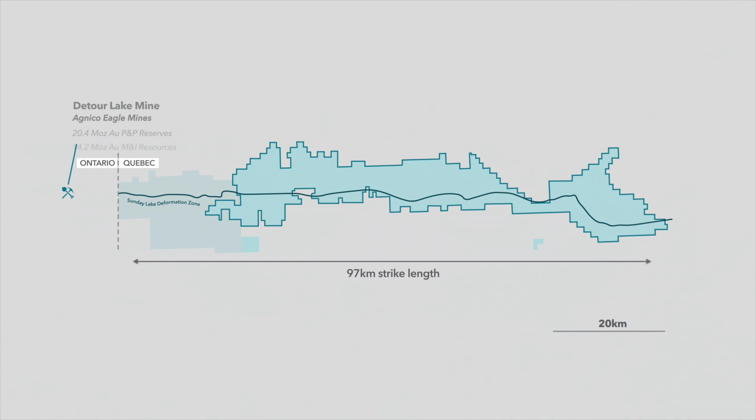Wallbridge Mining Company owns a district-scale land package in the prolific Abitibi Greenstone Belt in Quebec, Canada. We currently have over 5 million ounces of combined gold endowment at two growing deposits of Fenelon and Martiniere along the Sunday Lake Deformation Zone, the same structure hosting Canada's Detour Lake mine with over 40 million ounces of gold.

Wallbridge purchased a small 1,000-hectare property from Balmoral Resources called Fenelon in October of 2016, which included a small mineral resource of about 40,000 ounces, now referred to as the Gabbro zones. We continued exploration in 2017 and 2018 in this same zone, and while testing one of the exploration targets in late 2018, early 2019, we discovered the Tabasco Cayenne zones and subsequently the Area 51 zones, which earned us the Discovery of the Year by AEMQ in 2020.

Our successful exploration results following those discoveries allowed us to acquire Balmoral Resources, which not only owned the rest of Fenelon property, but also owned the majority of the land along the Detour Fenelon gold trend, stretching 97 kilometers from the Ontario border, where the Detour Lake mine is operating. The total land package owned and controlled by Wallbridge is now over 800 square kilometers.

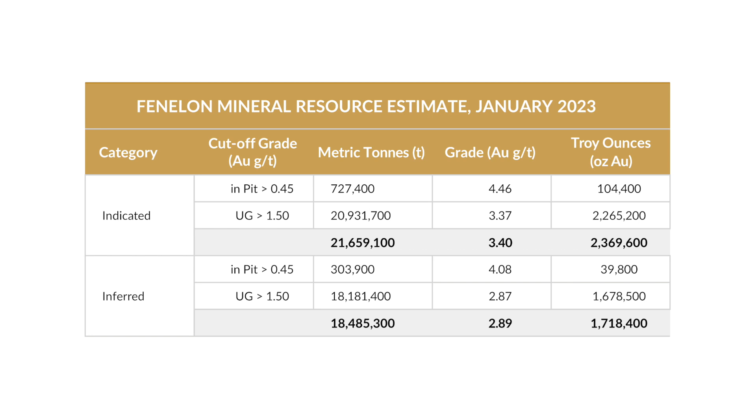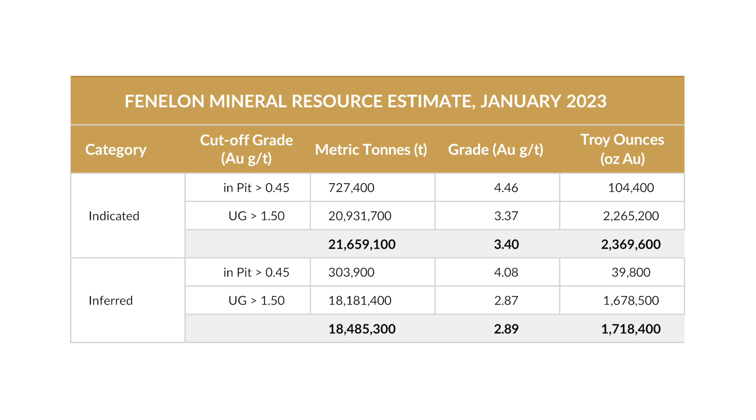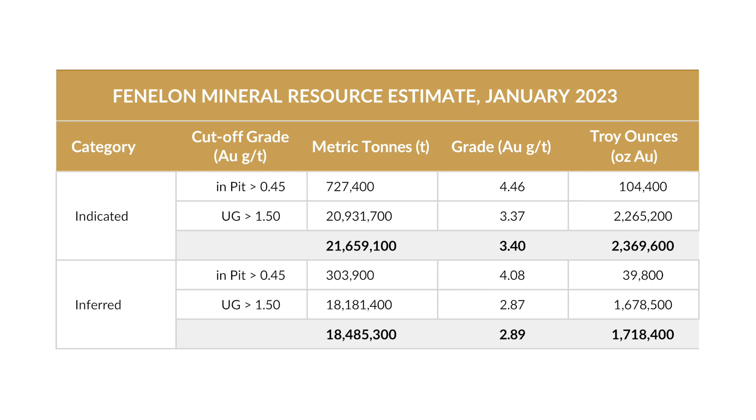Through successive and successful exploration campaigns since the discovery and acquisition, we now have two significant mineral resources at both Fenelon and Martiniere. We proceeded to advance the Fenelon deposit to a preliminary economic assessment, with the results just announced yesterday. The PEA, as reported in our June 26 news release, is based on the mineral resource estimate published in January of 2023, with 2.37 million ounces in the indicated category and 1.72 million ounces in the inferred category. The mineral resource estimate is primarily envisioned as an underground deposit.

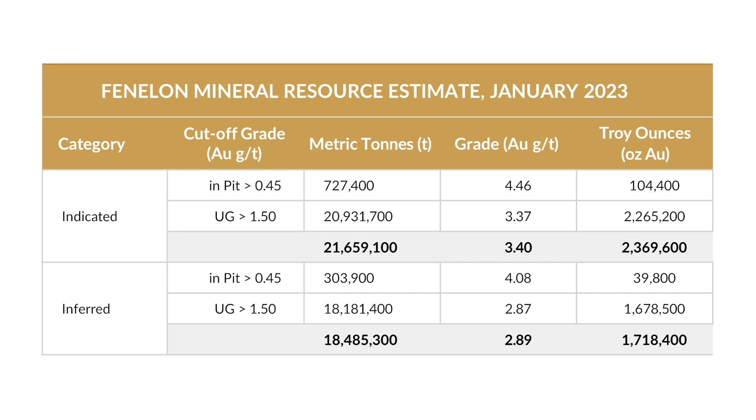This PEA is based on the development of Fenelon as a standalone underground operation with a mining and processing capacity of 7,000 tons per day. Fenelon currently has underground infrastructure down to the depth of about 200 meters, which was completed at various times in the past, including the development completed in 2018 and 2021 by Wallbridge. All existing underground infrastructure, such as ventilation raises and the exploration ramp to Area 51, are integrated in the PEA mine plan.

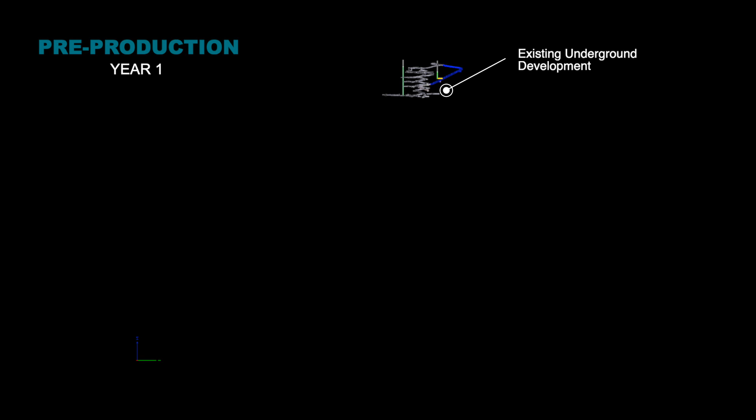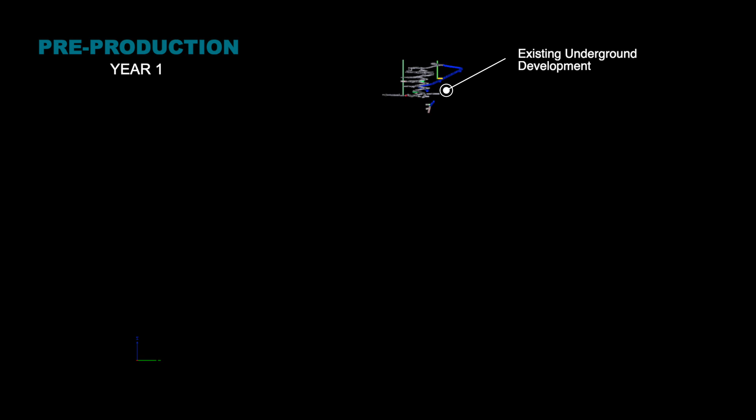In the initial 2 years of pre-production, we will continue to advance the main Tabasco ramp, which is sized at 5.7 meters wide by 5.5 meters high, to deeper extents. The ramp system starts in the Tabasco Cayenne zones, and then there will be internal ramps to access Area 51 zones. The levels in the Tabasco Cayenne zones are planned to be 40 meters floor to floor and 30 meters in Area 51 based on the mineralized zone geometry and rock mass classification.

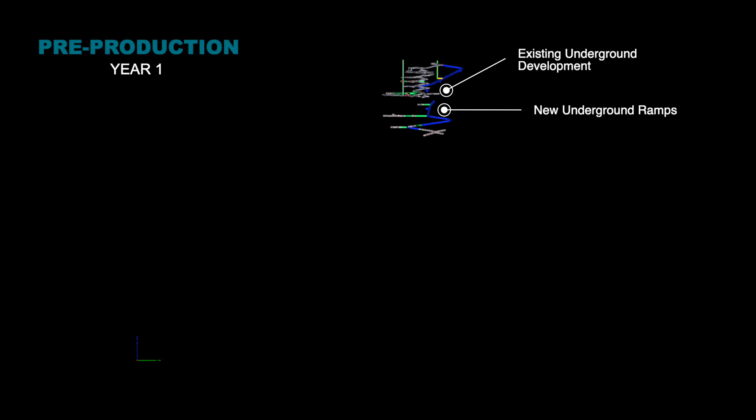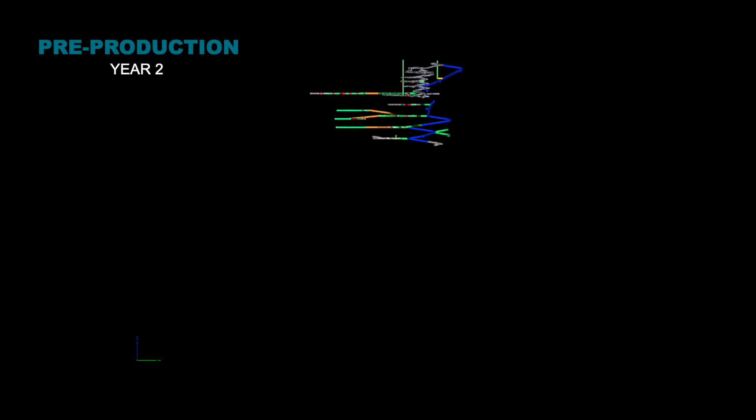The underground infrastructure, including vent raises, will be developed during the 2 pre-production years. All underground infrastructure during pre-production year 1 will be developed by mining contractors. In pre-production year 2, owner equipment and personnel are planned for lateral development with up to 5 development teams. All ventilation raises will be developed by mining contractors. We plan to start production from stopes in the year 2 of pre-production.

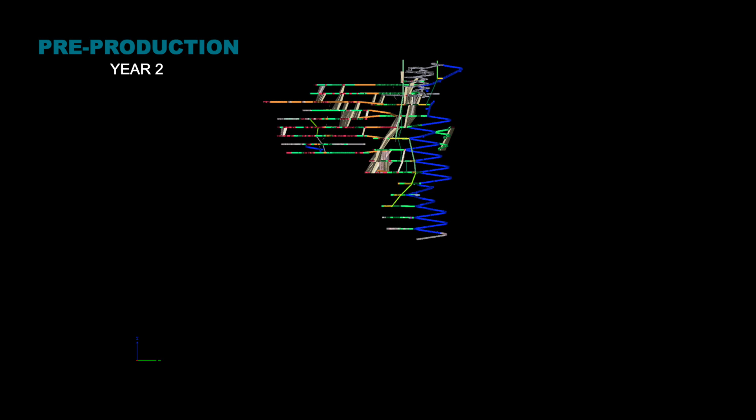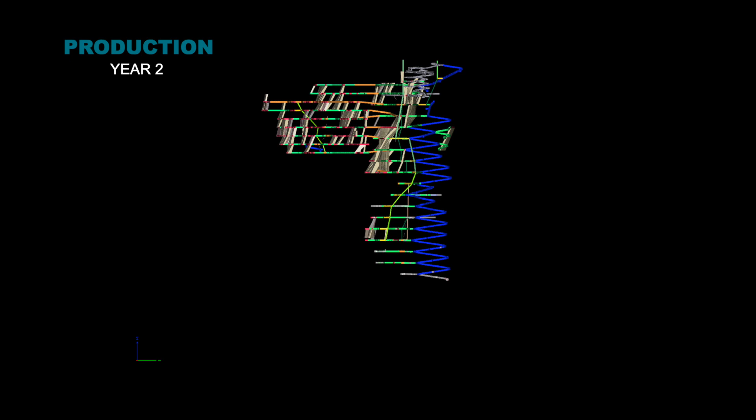Mineralized material from these stopes and development will be trucked to surface via the ramp and will be stockpiled within the existing open pit. During these 2 pre-production years, all required underground infrastructure to support production will be put in place, including the paste backfill distribution network. At the same time, all surface facilities, including the mine site, the processing plant, the paste plant, tailings management facility, water management and treatment facilities, and main ventilation installations will have been completed. All mineralized material and waste from the upper areas of the deposit will be trucked to surface using 63-ton trucks.

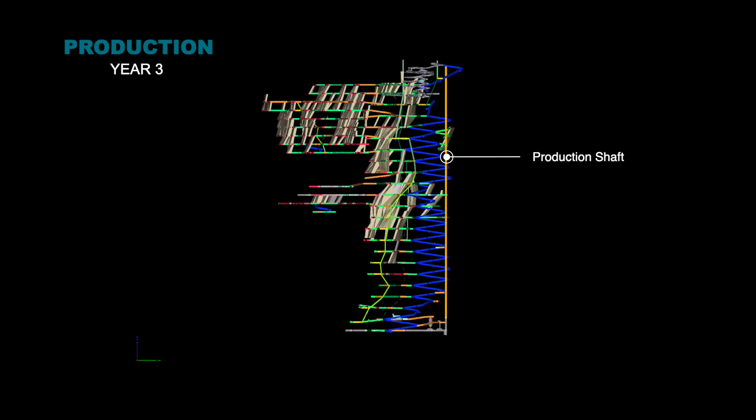Starting in the second quarter of production year 1, collar preparation and hoist at surface construction will start. Shaft sinking and construction of associated underground infrastructure, such as ore passes and underground crushing system, will start in year 2 of production and will be completed within approximately 36 months. The production shaft is designed to a depth of 1,040 meters. Starting in the last quarter of production year 4, all underground material will be transported via the production shaft using the double drum hoist with 18-ton skips to surface for processing.

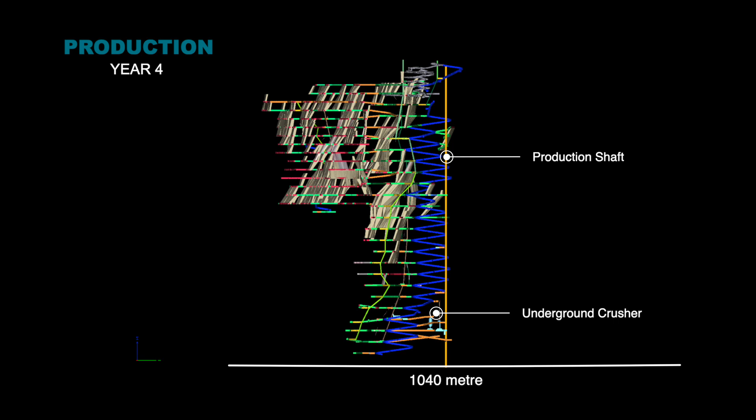The average size of the stopes from all zones is approximately 15,000 tons, with about 150 stopes mined out annually. The mining method will be long hole longitudinal method for stopes of 5 to 8 meters in width. This corresponds to about 40% of the stope tonnage. Transverse method will be used for stopes with 8 meters to plus 15 meters in width. These correspond to about 60% of the total stope tonnage. Mineralized material from development will generate about 10% of the total production.

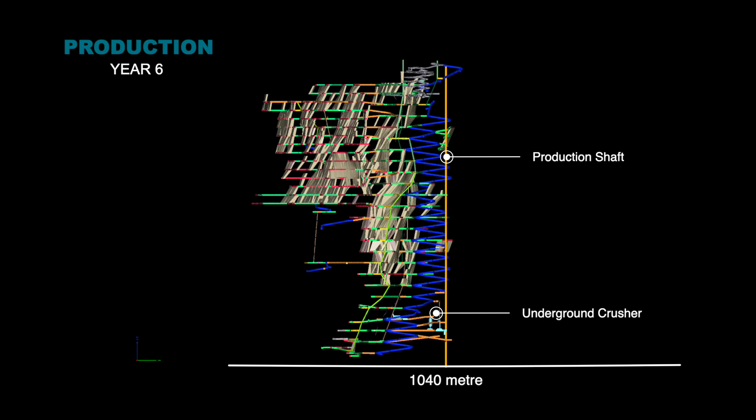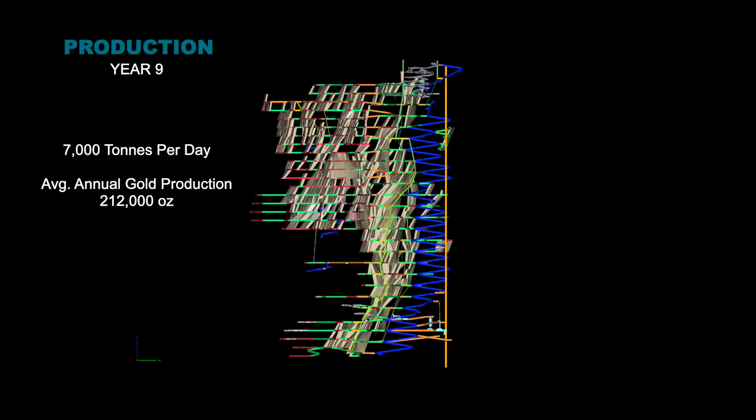The plant will process at an average constant rate of about 7,000 tons per day, starting in production year 1, and will produce an average of about 212,000 ounces of gold annually. The underground system of ramp, accesses, ore passes, ventilation, pumping, and paste distribution system continue to be expanded to extract the rest of the deposit during the 12.3 years of mine life.

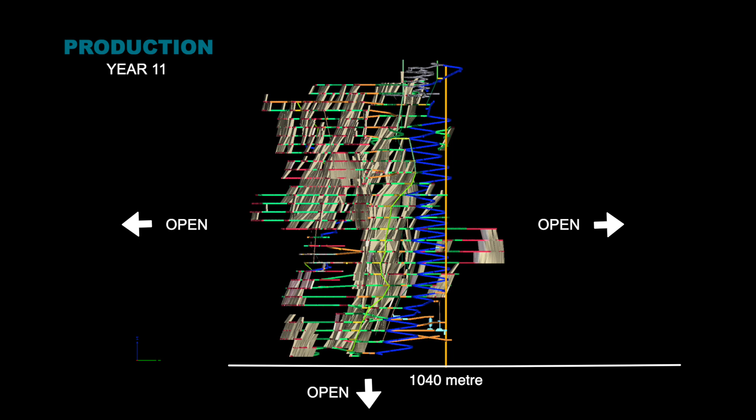This PEA only captures the deposit down to 1,040 meters. The deposit is open in all directions, and we see great opportunities to include additional ore tonnage, not only from below the lowest level, but also from additional parts of the deposit that are currently not included in the 2023 mineral resource estimate.